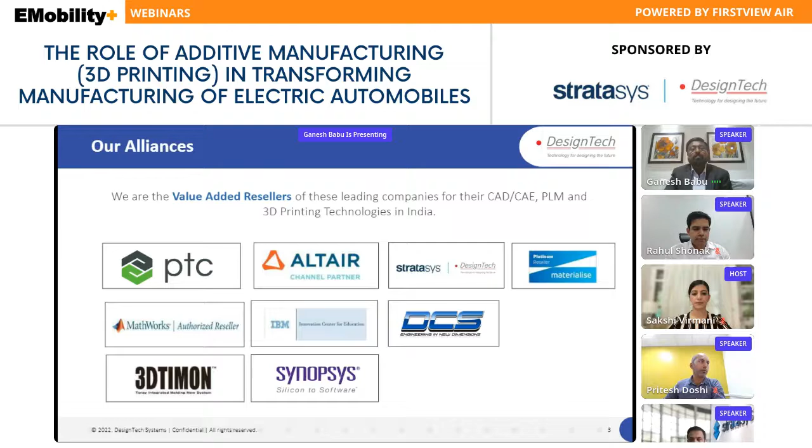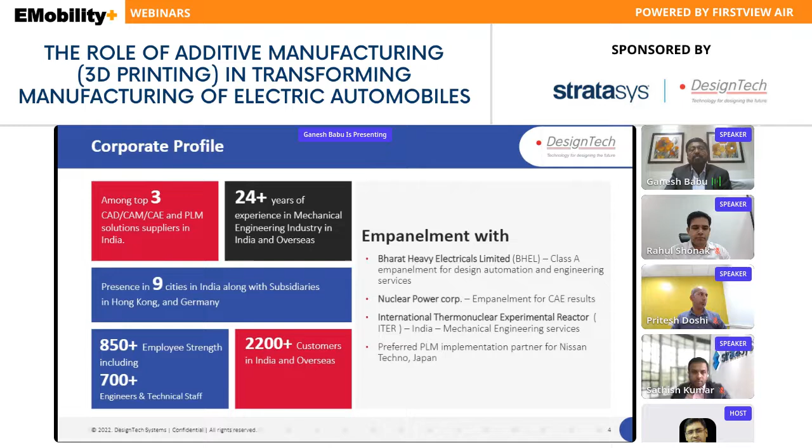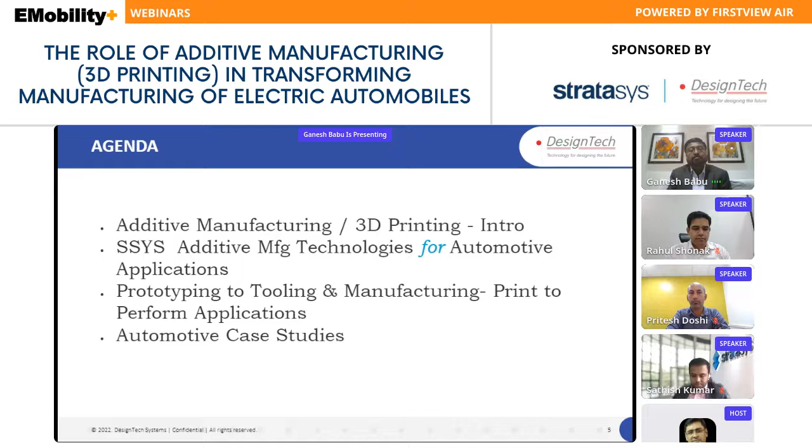Since I have a very short presentation time, I would like to lead on to the agenda today to take you all through additive manufacturing introduction, Stratasys AM technologies for automotive applications exclusively, prototyping to tooling and manufacturing. Primarily, we are going to talk about print to perform applications, automotive case studies, and then we'll get into the panelist discussion.

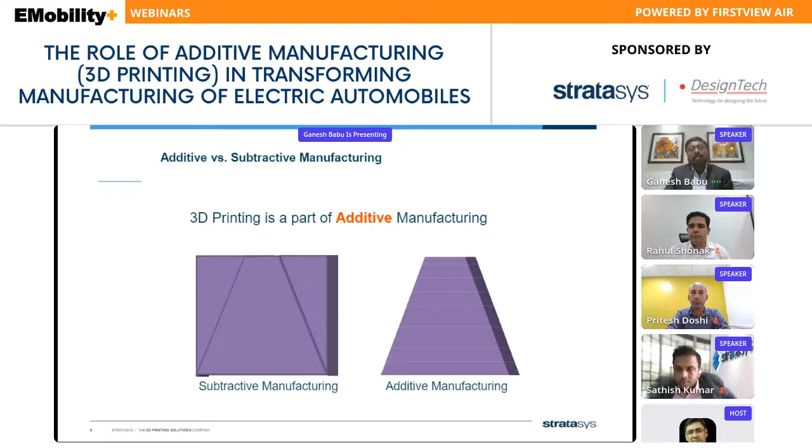Now, additive versus subtractive manufacturing, there shouldn't be any further introduction on additive technologies today. It is very well known that the process of additive manufacturing is opposite to subtractive techniques. All the while, for transportation, we have been using fuel based or gasoline based automotives primarily. But today, the transformation to electric vehicles is catching up for a greener and more viable world to live upon. So, very soon, fuel variants are going to become predominantly extinct.

However, in this onward journey of transformation to electric vehicle mobility, there is not going to be much of a change when it comes to the overall structure of an automotive. But the driving mechanism, the force which drives the mechanism within the automotive, and the components that constitute the electric vehicle are going to be very minimal in terms of manufacturing.

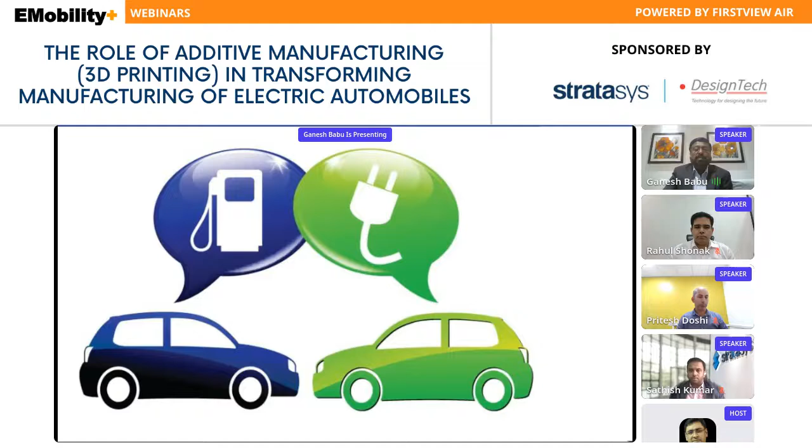While we look at lightweighting as well as creating electric vehicles, the structure and design philosophies of automotive designs are not going to change much, but they're still going to become more and more creative. So today we are going to look at electric vehicles, which predominantly have a powertrain that comprises a battery pack, an electric motor, and transmission for the momentum created in electric automotives.

But for the fuel automotives, an internal combustion mechanism of the engine that burns the fuel to propel and gain momentum for the vehicle is what predominantly separates both of them. Ideally, an electric car is always called a silent machine, thanks to the electric motor which takes care of it. Whereas in a layman's language, a fuel based engine burns fuel to generate energy to propel the vehicle, as simple as that.

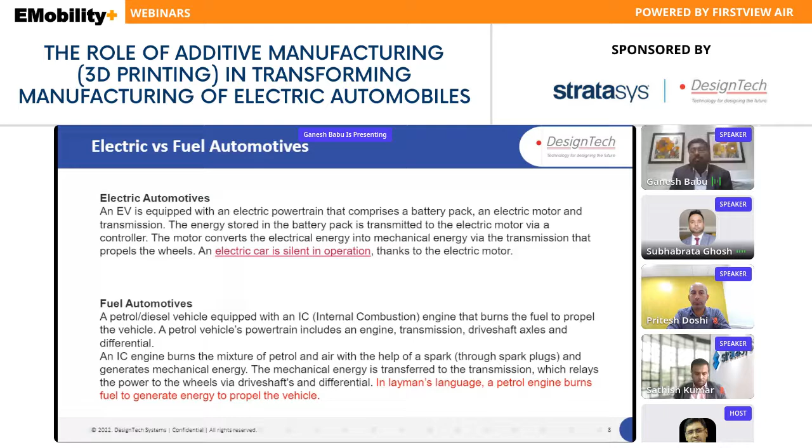So, moving on, while we talk about the key challenges in the automotive vertical, there are increasing regulatory requirements on the existing fuel based variants, tighter fuel economy and emission requirements, and more importantly, with more and more upgrades and newer designs in the fuel variants coming up, the prices are also increasing. And the preference for customization, low volume, and a high level of complexity is taking over the latest designs in the automotive world.

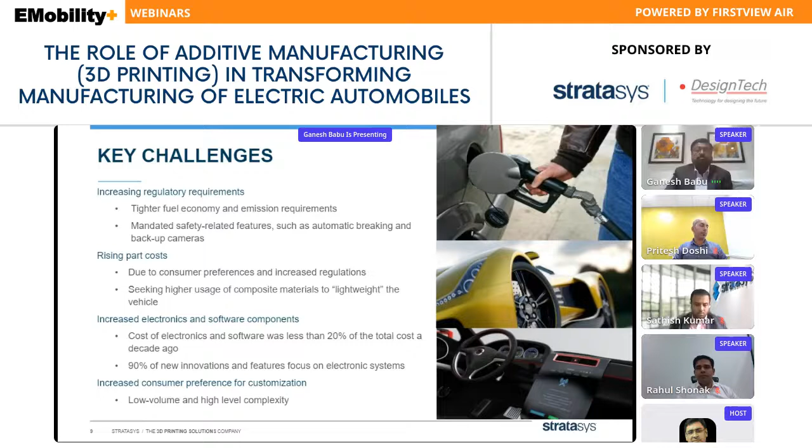But now, while we look at some of the challenges, what is so very interesting about additive manufacturing as a technology for supporting automotive verticals? Well, rapid prototyping, as we all know, from concept to physical realization of parts. Additive manufacturing has been predominantly understood for creating a physical model, called a rapid prototype. However, over the years, the evolution of the technology and primarily Stratasys have been the game changers to revolutionize the way 3D printing has been looked upon.

So now we are going to look at production parts. Production parts that have been rolled out from 3D printers are today assigned to end use automotives that work till the end of life. So there are quite a lot of questions when it comes to production parts. What about the surface qualities? What about the limitations in terms of materials and so on? As I mentioned, Stratasys has been a game changer. We will gather more information in the coming slides on the Stratasys front.

But now, the next segment that I'm focused on is the forming tools. Forming tools have been manufactured through subtractive manufacturing methods that support productionizing of components, with metal predominantly being used. Here we are talking about Stratasys technologies with polymer based tools that give shape to metal. And manufacturing aids are quite a lot. Cost effectively printing without having to compromise or limit the performance of a given tool on the shop floor is something very interesting to take note of.

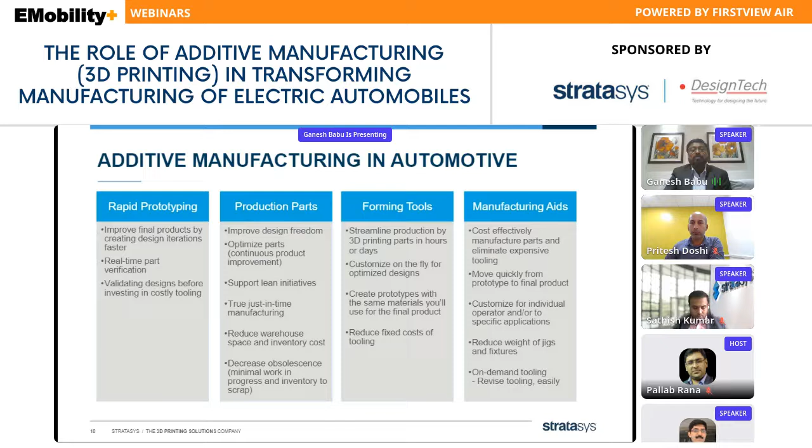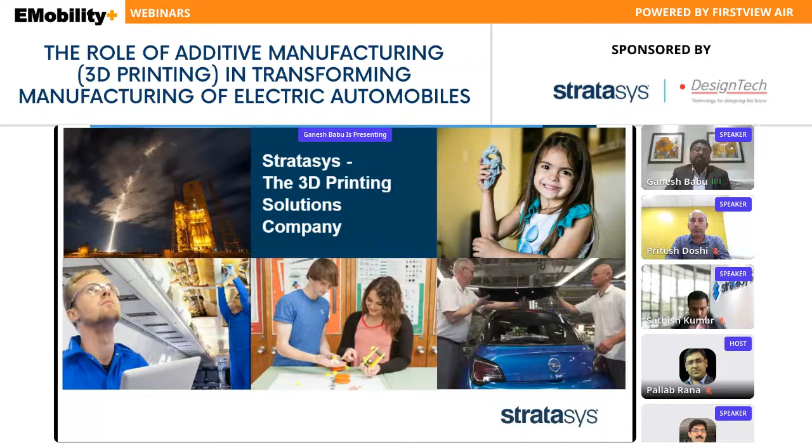Well, with this brief introduction on additive manufacturing for the automotive segment, let's look at Stratasys, the world leaders in additive manufacturing technologies, innovation for the digital factory. Stratasys, the 3D printing solutions company, has touched upon every vertical, whether it is space, with rockets flying with 3D printed hardware, or the medical world, with 3D printed anatomies that mimic what nature has given us very, very closely. It's an exciting world. Apart from aerospace and automotive, the medical segment has been fascinated to work with world leading technologies, untouched by competition, with multi material processing of human anatomies.

For the last 3+ decades, headquartered in Eden Prairie in the US and Rehovot in Israel, there have been multiple granted as well as pending patents for Stratasys. As a publicly traded company on Nasdaq, Stratasys have never shied away from any challenges that come their way. They have been able to add mainstream technologies apart from what they have developed.

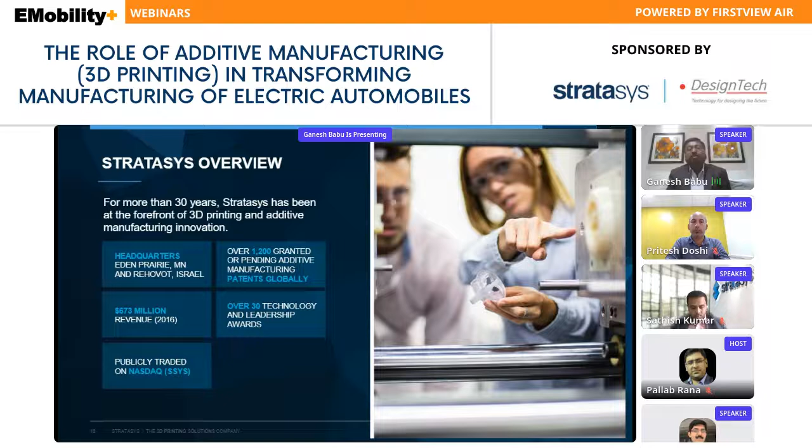But before getting into more on the core strength of Stratasys technologies, let me give you a brief overview of traditional or subtractive manufacturing processes. There are quite a lot of advantages. It's a good fit for high volume productivity, irrespective of the components, whether it is a polymer based or a metal based outcome that you are expecting from a manufactured tool. The subtractive process enables you to process your parts with a wide variety of materials. That's also very interesting to take note of.

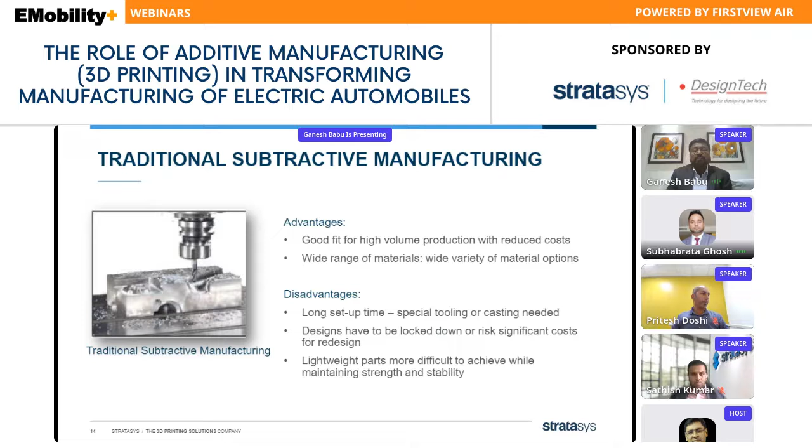Newer materials get developed, they get processed with the subtractive manufactured production tools. But the disadvantages are huge investments, and the time spent in getting the manufactured tools is very long. That's a challenge where additive manufacturing scores, providing a quicker and primarily cost-effective solution. Advantages: you're not going to be limited by any design barriers in manufacturing, because additive as a process gives you unlimited variation of complexity in designs which you could adapt and start printing.

You can integrate your components; we call this part consolidation. You can have a combination of hybrid outcomes with plastics as well as metals integrated in the process of manufacturing. You have a flexible supply chain, which is very important today. No need to have physical tooling or storage spaces that occupy a large factory floor space.

But the disadvantages are limited materials, very limited materials. And that's where the R&D of Stratasys comes into the picture, to integrate and start working on customer-based, end-use, application-based materials that have been rolled out.

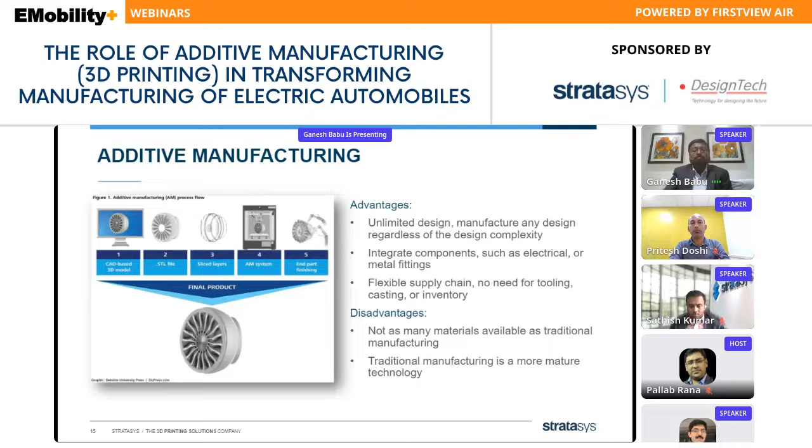Traditionally, we look at manufacturing as a more mature technology. But the various advantages that Stratasys offers today give us design freedom. You can have part consolidation, multifunctional parts, and optimized structures. It could be lattice structures, or design for additive manufacturing, which is a great boon that creates lightweight parts, and more importantly, it ensures that the process of 3D printing is much faster, consuming less material.

What the customers gain by using additive manufacturing has been summarized here. Low volume custom applications can be addressed, and on-demand production can be made fast. For on-demand short-run production, 3D printing today stands up to meet those manufacturing quantities. Part assembly consolidation: here we are talking about limiting the part count, combining multiple parts and consolidating the design, making it more complex, which is a sweet spot for additive manufacturing.

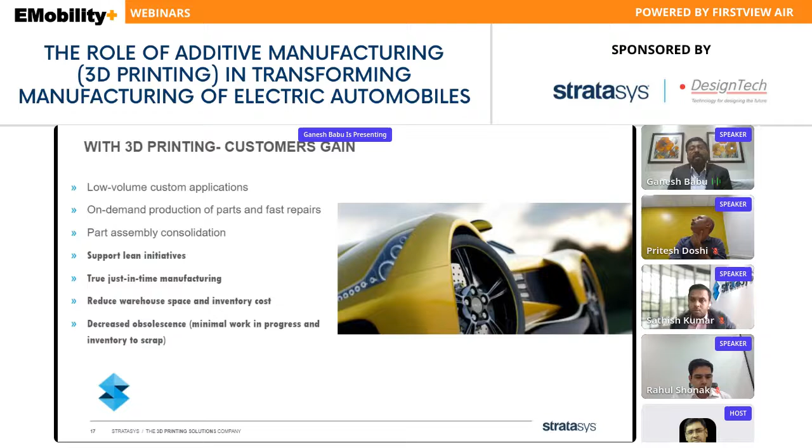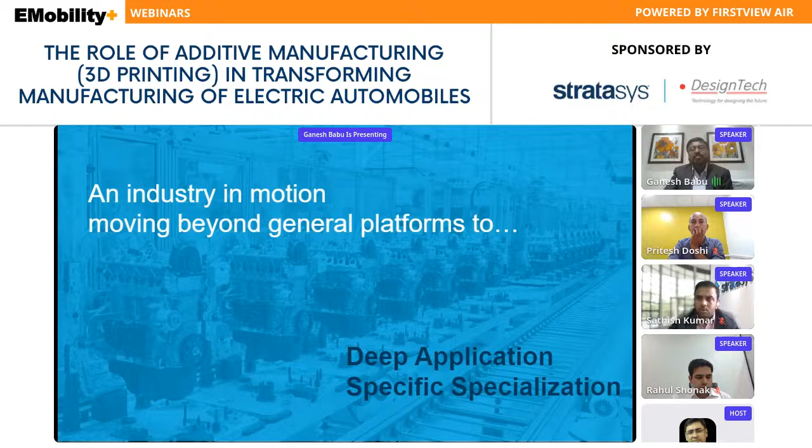And for supporting lean initiatives or true just-in-time manufacturing, additive technologies are the best option today. Here we are looking at Stratasys as an industry in motion, moving beyond general platforms and focusing more on deep applications. What are these specialty applications, and what are the technologies that Stratasys supports today?

Today we are looking at five different best-in-class, world-renowned technologies supported by Stratasys. All along, industrial FDM and PolyJet technologies were ruling the Stratasys product lines. But with the introduction of additional technologies, from companies acquired by Stratasys, they have reinvented the wheel of manufacturing. Today we are looking at manufacturing tools and production parts from these technologies. We will look very briefly at all five and where they lead the automotive world in acquiring best-in-class parts for manufacturing.

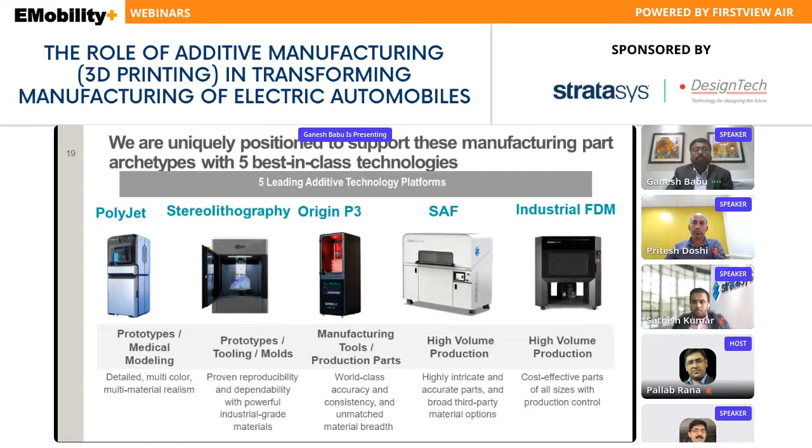Moving on very quickly, here we have a brief on the SAF technology. We call it selective absorption fusion, wherein, while supporting the green revolution for automobile manufacturing, here is a technology with a 100% bio-based, sustainable castor oil-based raw material, polyamide PA11. And there are various value adds working with this material and the technology.

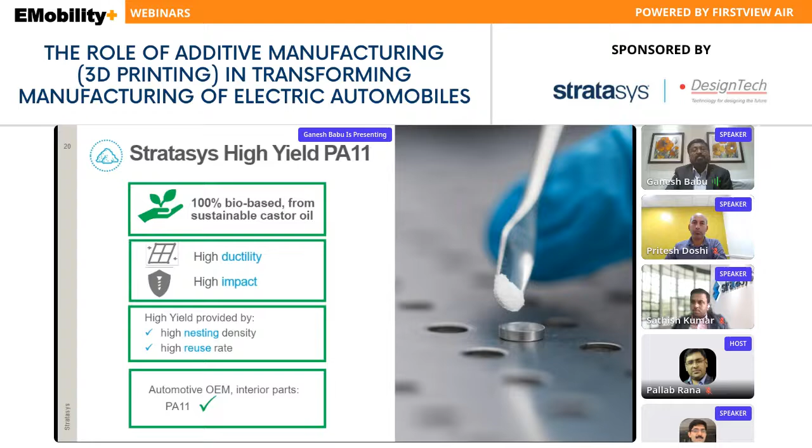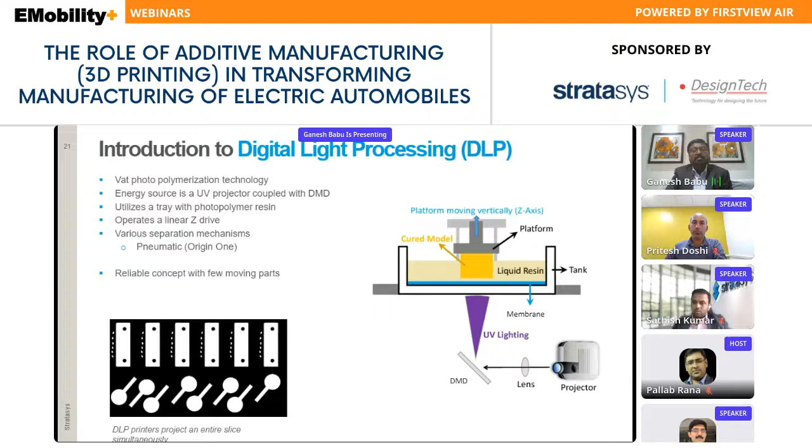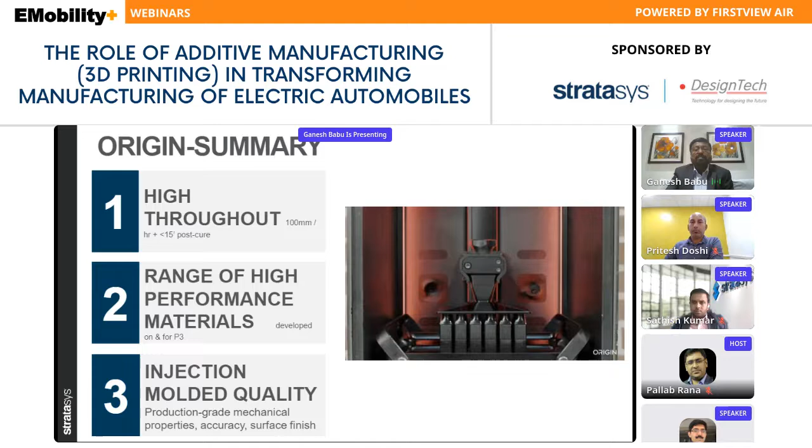And the DLP process of the Origin One, it's a VAT-based system, ideally best fit when it comes to realizing end production parts. I'll take you through a few other throughputs, but the summarization on the DLP stands for high throughput, range of high performance materials, injection molded quality. And here we are looking at PolyJet.

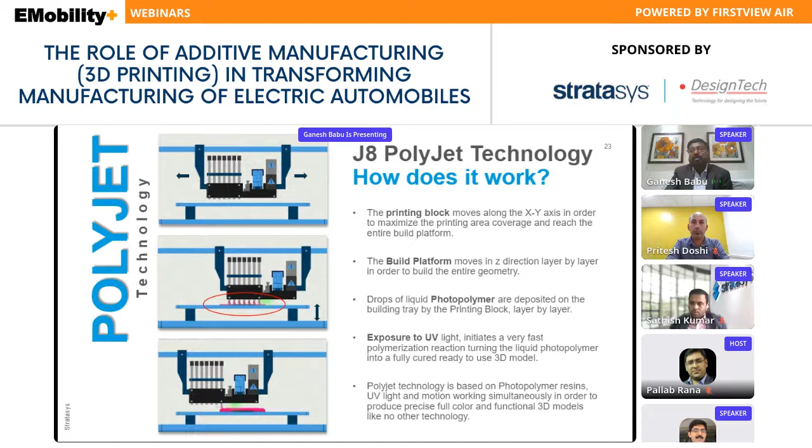As I mentioned, here's a platform that could allow you to mix and match seven different materials on the go. The eighth material can be the support material, soluble in nature, as well as a washable material. Highly front ending to support design realism for high fidelity modeling. CMF outputs, color, material, finish, are today never left behind. In a single shot printing, you'll be able to achieve that.

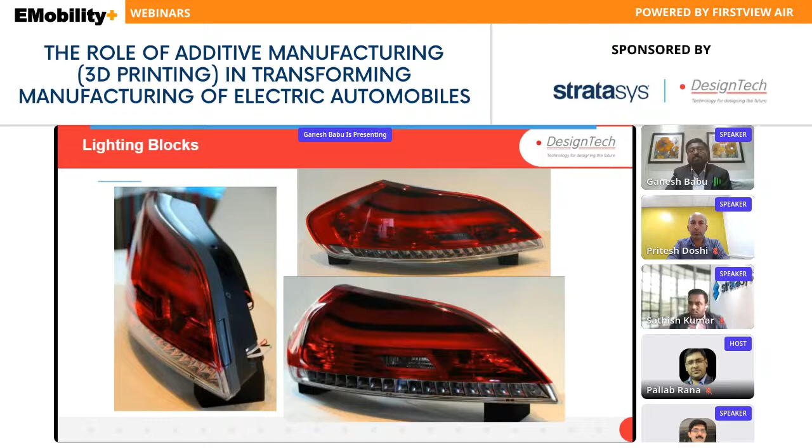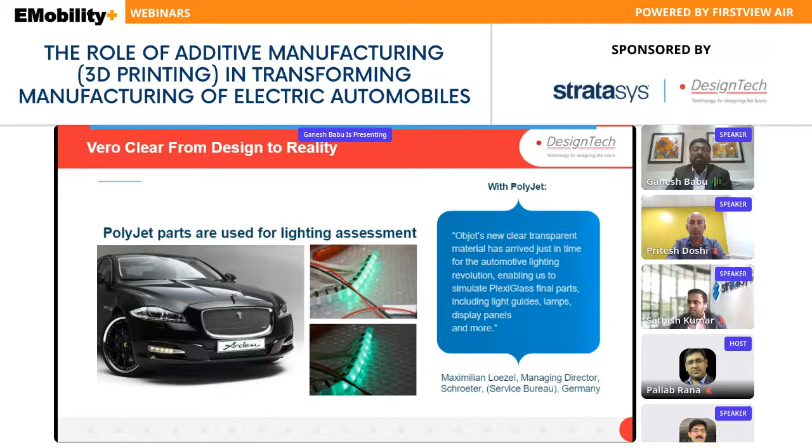And with PolyJet, the realization of lighting blocks gets closer to injection molded quality in your product development. If you're going to look at making these clear light blocks, truly the best in class the world could see is the PolyJet technology from Stratasys. So PolyJet parts are used for lighting assessments because of the transparency and the ability to reach the colors of the production parts.

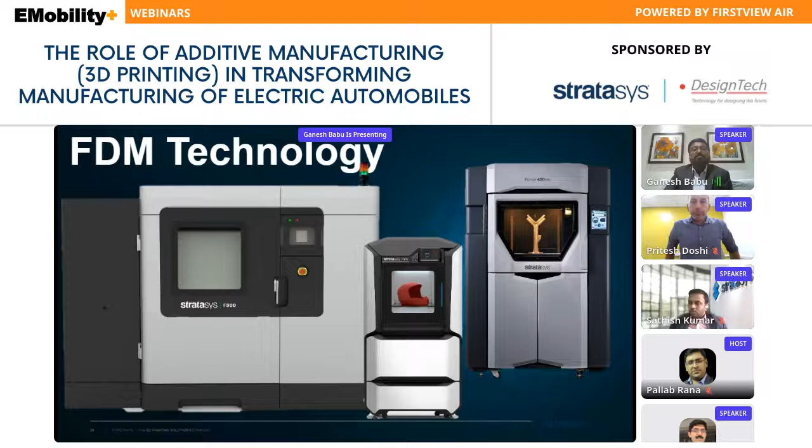Now looking at the FDM technology, these are workhorses. Never looking back. You could customize your prints, solid to various levels of customized throughputs that could be realized with the technology. The applications vary from prototyping to tooling and end use parts with the Stratasys product line.

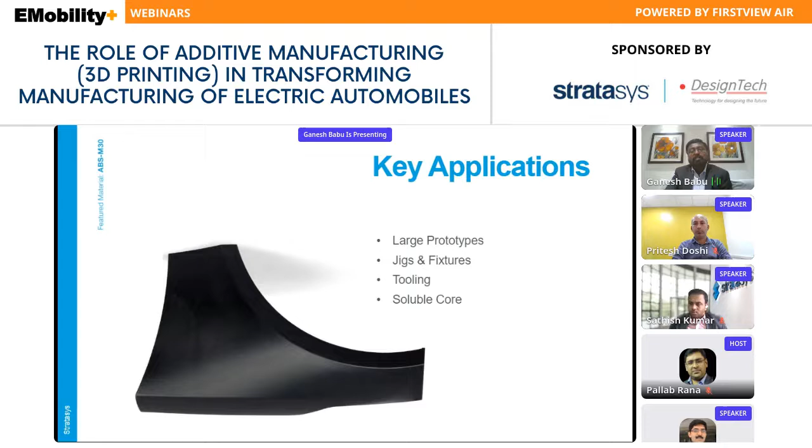But the key applications that we look at using all these technologies are large prototyping, jigs and fixtures that could support the manufacturing lines on the shop floor, tooling applications, soluble cores, wherein without any split for non-linear features, you will have the soluble cores that could support you to realize your parts in quick turnaround time without any tooling.

But when it comes to end use applications, here we have for automotive exclusively a UV stable material called ASA that you can print, and you could have your class of designs that you can print and mount on these bumpers, which are called end use car panel applications that are well supported.

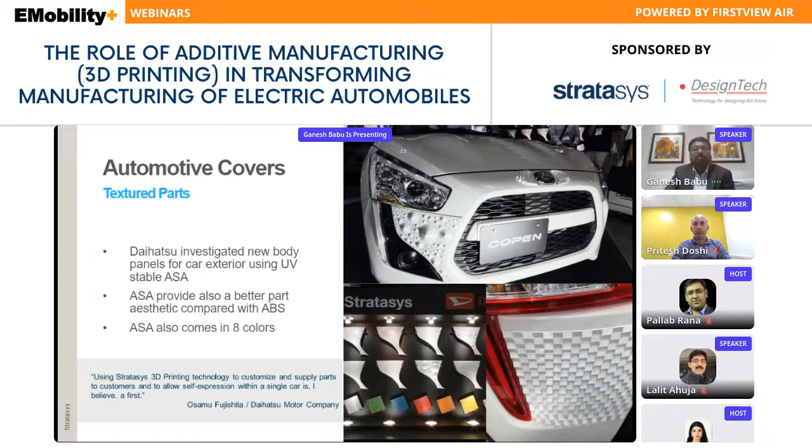While we are talking about electric mobility, irrespective of any given variant for the automotive sector, what is very interesting is how quickly you can have high strength, highly durable outputs. Not only automotives, I have been associated with various aerospace majors to create fuselages, wherein whether it's a helicopter model or an aerospace design, the FDM technology, the F900, stands by to print large segmented parts that can be mounted together post printing.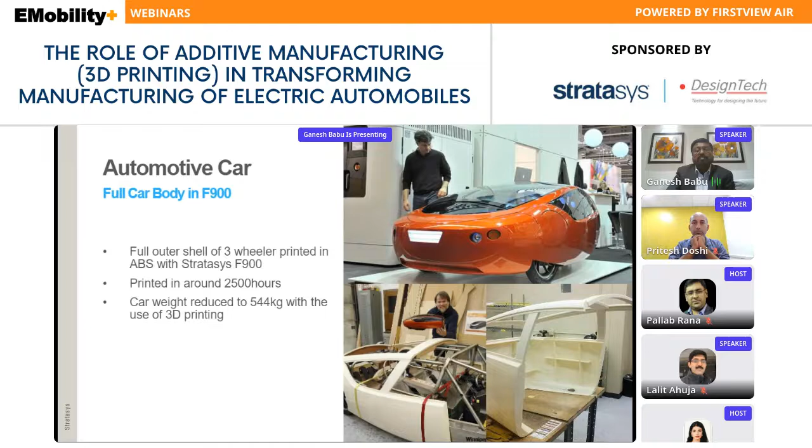And now comes the interesting aspect of applications. Every given product line has something or the other to talk about in terms of sheet metal components. Now, while we look at giving shape to sheet metal parts without progressive tooling, we have to look into form tools, stage-wise forming tools.

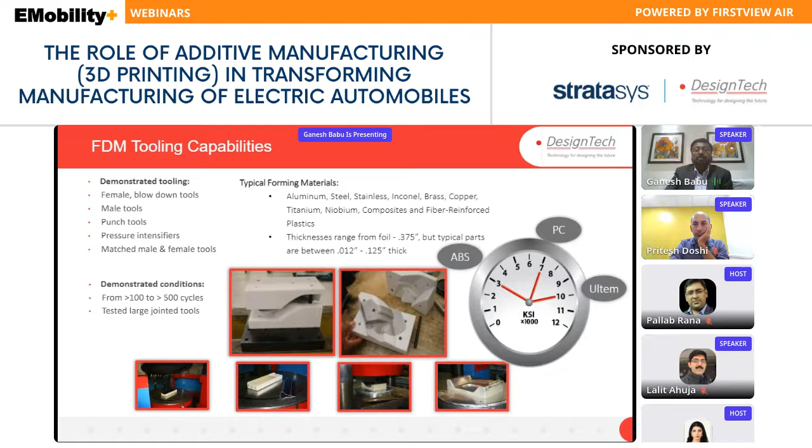Typically, you are not limited to only soft metal. Yes, you can work with titanium, you can work with stainless steel, but the quantities can get narrowed down well before your production tooling can come into the picture. These could give you batch quantity manufacturing that could happen on the fly. Overnight printing of tools, you have your blanks ready, put them on these polymer tools and get to realize those quick numbers in a very short period of time.

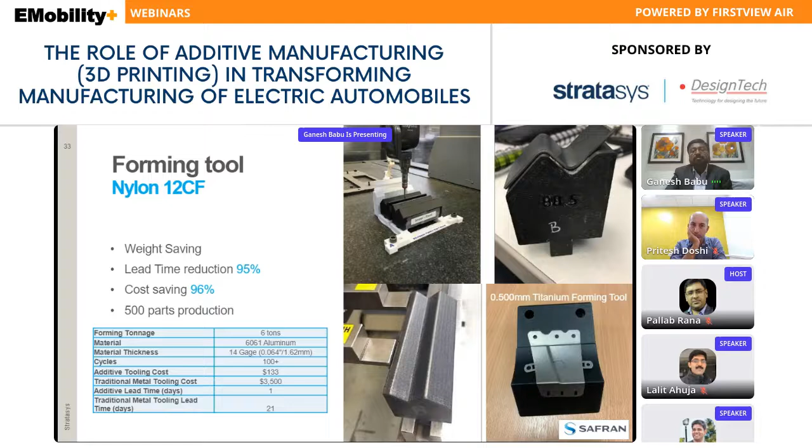Today, there are materials such as carbon fiber filled nylon that could be used for more durable printing. Here, even if it is not 95% on the lead time savings or on the cost savings, there could be savings in excess of 60% and above in terms of both cost as well as time by using the polymer based FDM technology in printing form tools for sheet metal forming applications.

The variety of materials, the high performance range of materials that the FDM technology offers today can give you materials such as the FDM Nylon 12 CF. These are chopped carbon fibers wherein these materials withstand high fatigue, with high strength and stiffness to weight ratio, an excellent material for lightweighting tooling, functional prototyping, production parts, end use parts, and more.

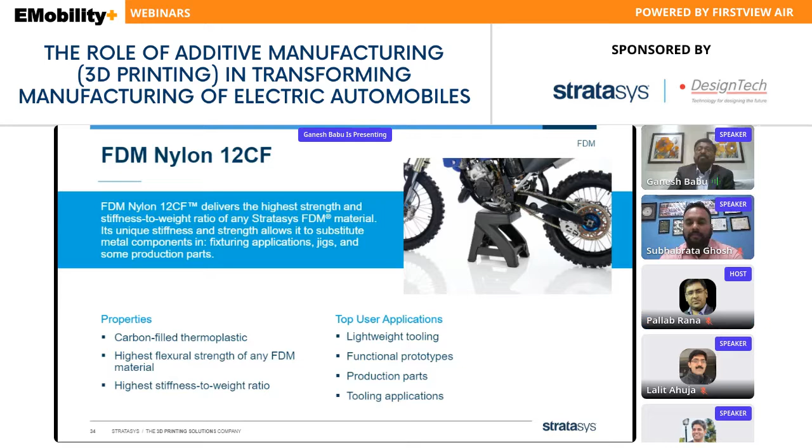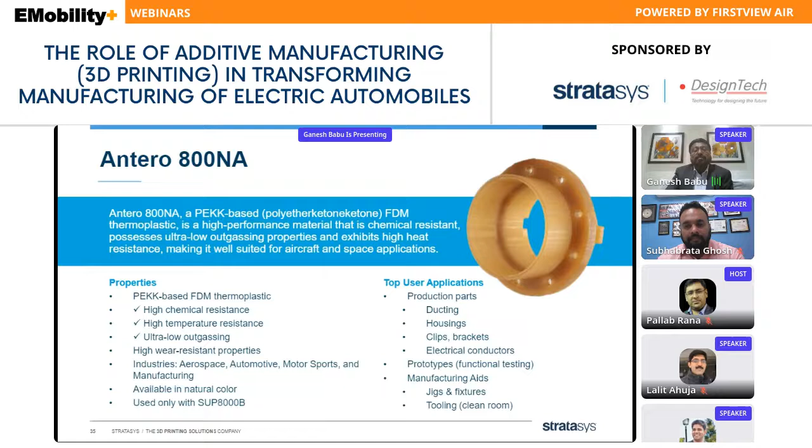Very similarly, we have the Antero 800NA. Antero is a grade equating to the PEKK material. We call them polyether ketone ketone based material. It is a high chemical resistance and high temperature resistant material with ultra low outgassing and high wear resistant properties, wherein they can withstand more and more manufacturing rigors on the shop floor to support shop floor manufacturing.

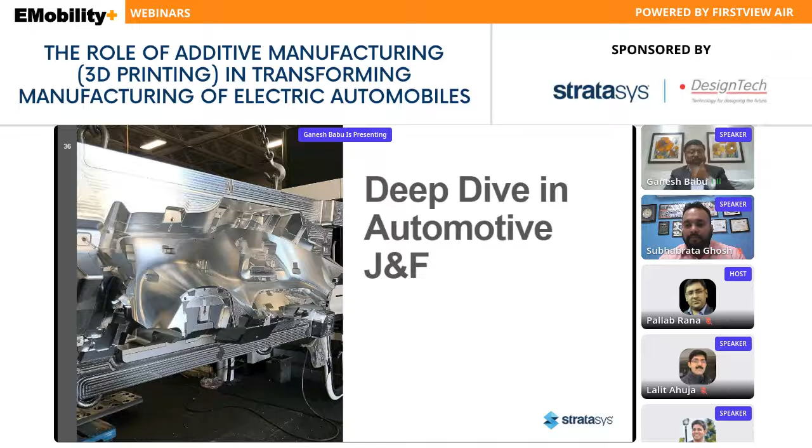While we deep dive into automotive jigs and fixtures, the complexities of a given part that get machined, whichever sector of manufacturing it is. Here are some of the automotive gauges that have been printed. All the while it has been metal. You need to suspend those metal gauges for edge checking through cranes, etc. Today you have the flexibility to design for additive manufacturing, lightweighting, and more importantly, a single operator can use a 3D printed ABS output for edge checking gauges.

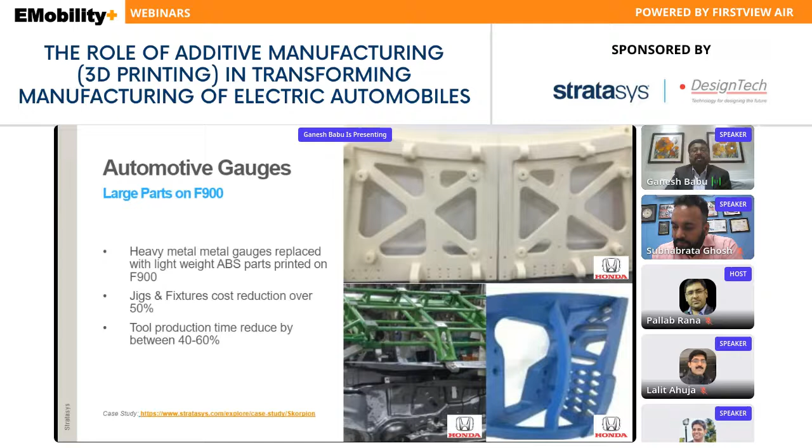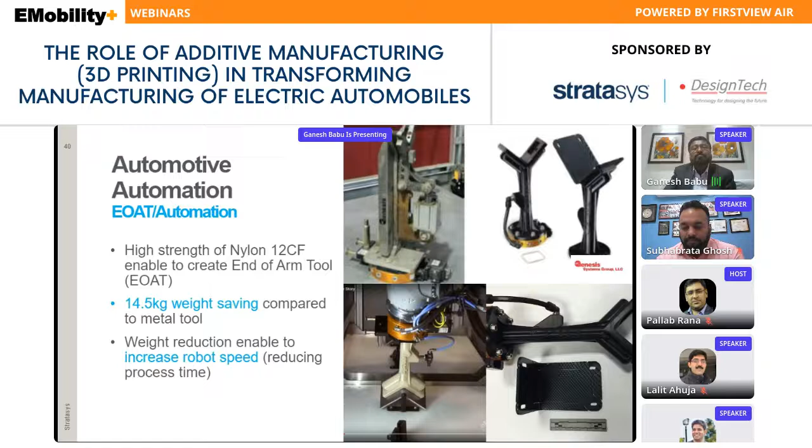On the same lines, various automotive majors are using it for end use applications and end of arm applications such as Nylon 12 CF tooling, wherein it is a single part with part consolidation. With traditional methods, as you see, the metal blocks are huge and heavy, and multiple settings are called for in manufacturing these complex tools. But today with 3D printing as a single step solution, you're able to realize end use parts that could go on automotives.

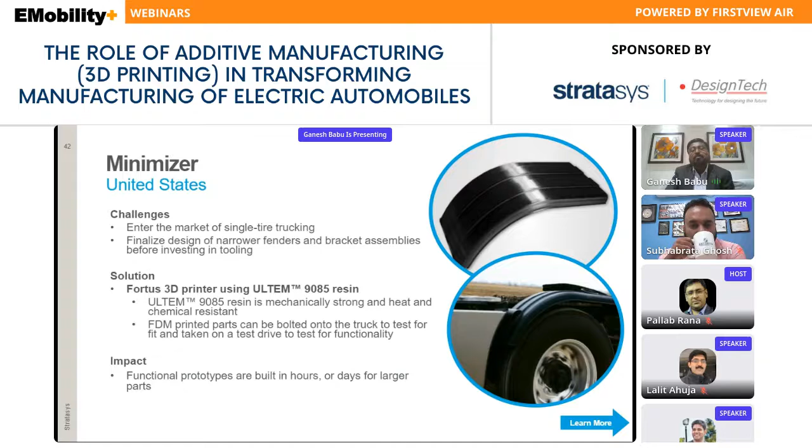Some of the case studies, very quickly, I'll rush them through. Minimizer uses these fenders. These are fenders on the truck, printed with black Ultem material, directly mounted onto the truck and field tested for the design and part strength before stepping into production. For low quantity manufacturing, it's an ideal fit. And on transmission gears, Premium Transmission in India uses ABS based outputs for complex transmission parts.

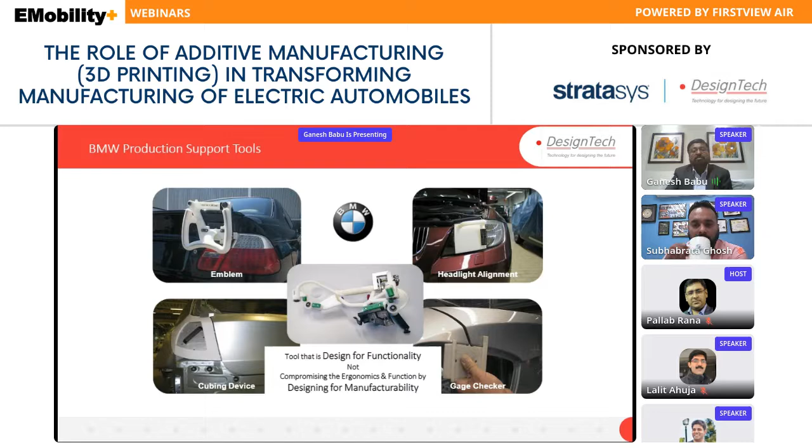And when we are looking at tools for automotive product lines, here we have BMW using Stratasys FDM technology for every vehicle variant. More than 400 jigs and fixtures have been rolled out, under the hood, as well as for headlight alignment, emblem placement fixtures, cubing devices, and so on. All these are quickly manufactured.

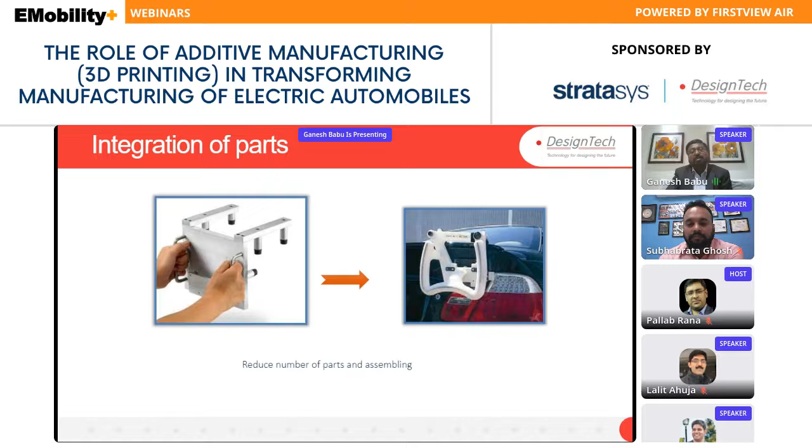There you see on the left the handles, heavy metal fixtures being replaced with lightweight internal sparse mode printing, giving more comfort and addressing worker fatigue in the automotive sector. Automotives have started using them on the shop floor. Multiple sets of these printed parts are used on the shop floor today. There you see the various designs wherein additive has taken over and supported the manufacturing lines in a very big way.

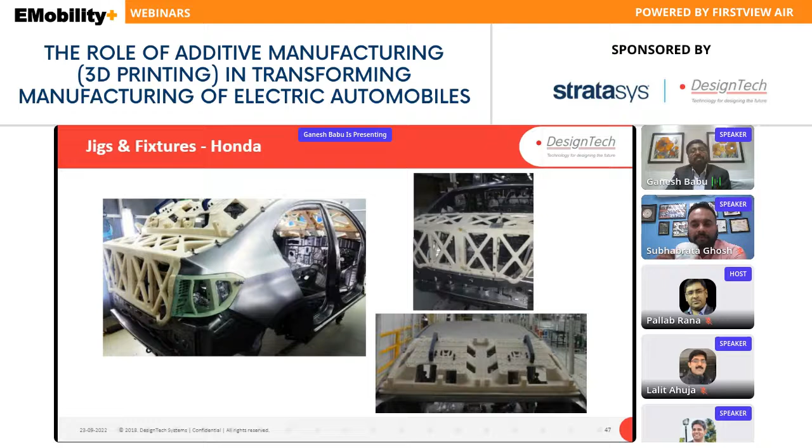Honda has used this instrument panel. What is interesting about the instrument panel as a prototype part is that it is printed in multiple segments and then bonded together. The creative edge here for the designer is not just catching flaws in the design, but beyond that, when production has to start, what we call concurrent engineering, to develop fixtures. All those seven small blue stubs with the complex profiles captured from the part are printed with FDM ABS blue material, and they are a one-time setup on the CNC platform.

I would rather take a printed part, locate it, and start checking for work holding as well as for CMM inspection. And this is the creative edge. Looking at small little stubs taking the entire instrument panel load gives a creative thought, and that has led to various new and more interesting shop floor application fixtures.

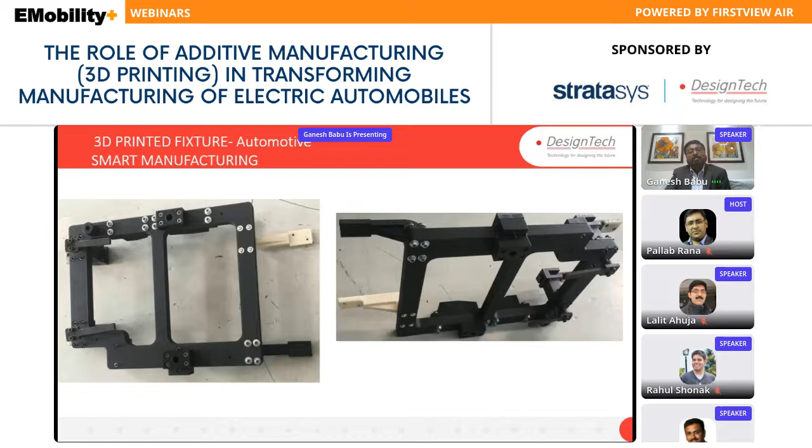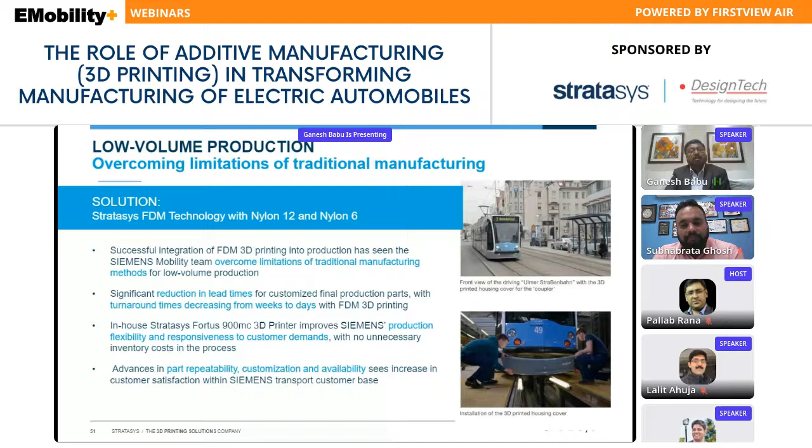Here are the smart manufactured fixtures which I have been associated with for an XUV500. This takes a load of close to 280 kgs for setting the carriage and the engine to be put up for assembly. And ideally, when it comes to low volume production, here we are looking at a technology that could support nylon 12, nylon 6, nylon 12 CF, and so on. So FDM is for high strength durability that supports all automotive manufacturing as well as manufacturing tools.

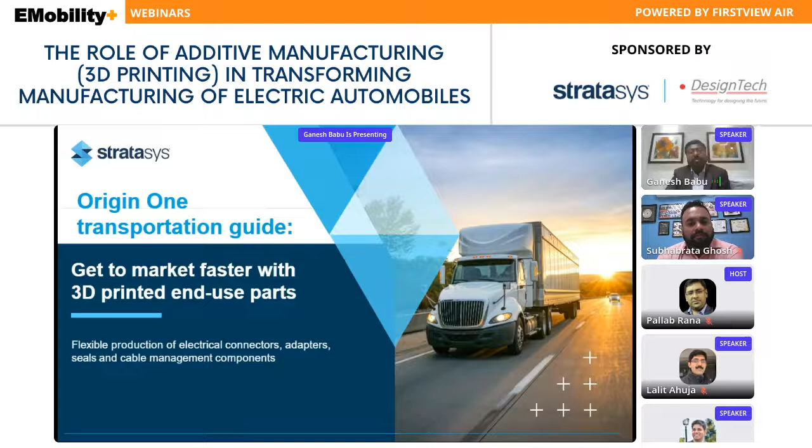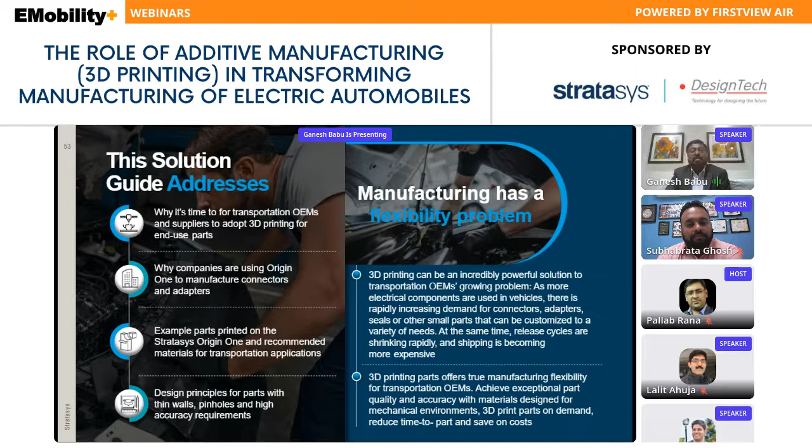Now, Origin One, the P3 technology: when we are getting to market as fast as possible with 3D printed end use parts, here we are finally realizing flexibility. While we are talking about moving on to EV manufacturing, what is interesting is, are we prepared to have quicker solutions to support the cost of newer development in the design and the manufacturing process? Yes, here it is time for end use part manufacturing.

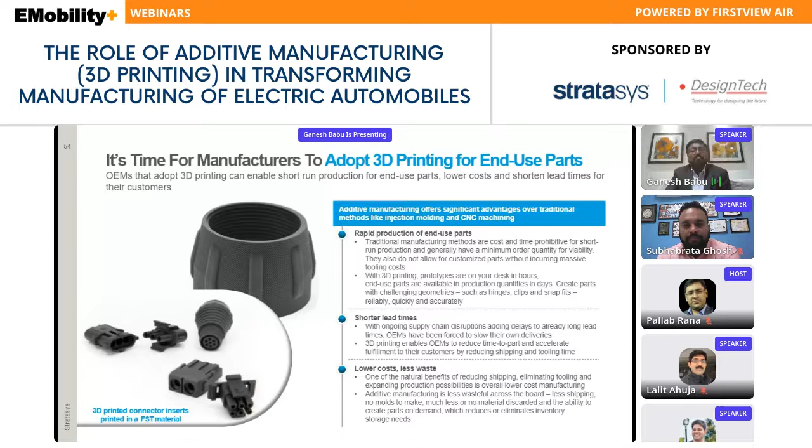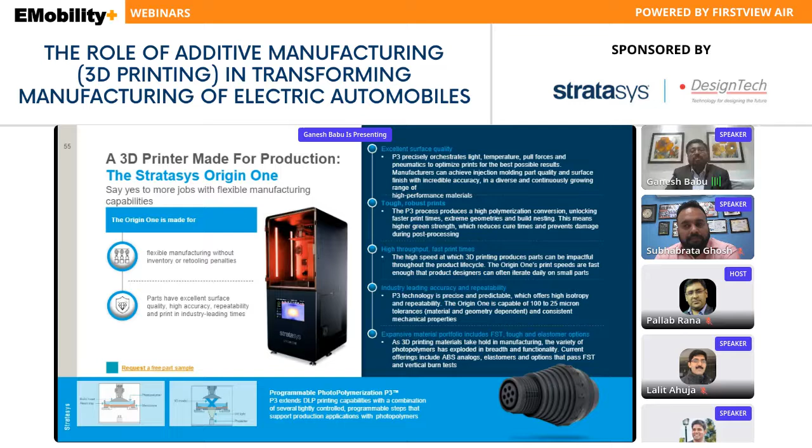Ideally, the best fit here is for all small components, whether it is the connectors, all of them with very minimal time consumed, with high precision and injection molded quality surface finish. As an open source platform, it can also let you achieve very fine accuracies, with tough and robust materials available. And when the surface quality is of injection molded grade, there are unlimited possibilities to adapt to newer modes of automotive manufacturing of end use parts.

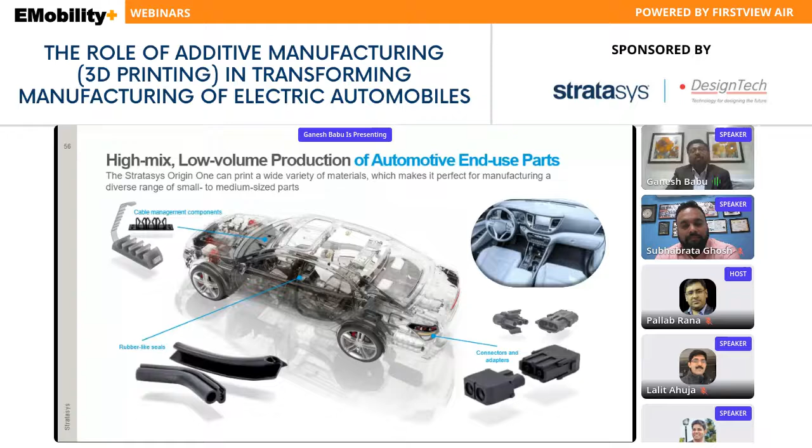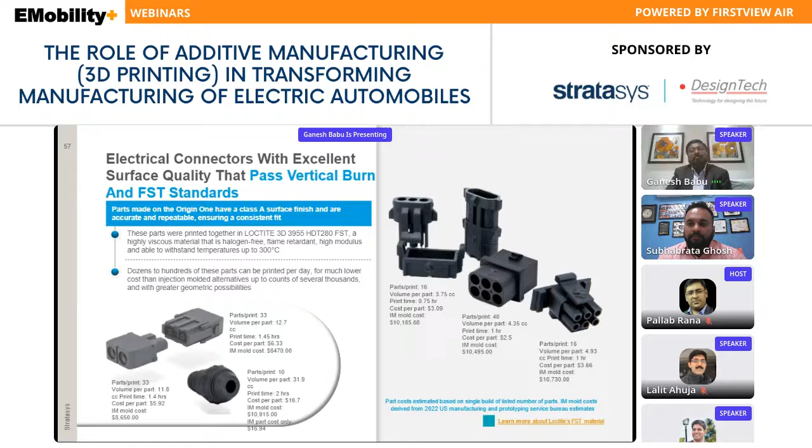Ideally, the best fit here is a single system that can give you high strength materials and flexible materials, all on a single platform. And more importantly, with very quick and easy change of materials from one material to the other, even for the more complex parts, soft tool manufacturing is eliminated. And we have FST grade materials that support stringent manufacturing requirements, and flexible rubber seals for automotive. All this could be manufactured with the Origin P3 technology.

Moving on with additive manufacturing produced tools, here is more of a hybrid case, where a complex 5-axis surface needs a fixture for drilling with a certain pitch, distance and accuracy. You have fixtures generated with 3D printing using FDM technology. So tooling with more complexity is well addressed, with improved ergonomics, lightweighting, weight reduction, easy customization, and today these are cost effective for low quantities and a best fit to begin with.

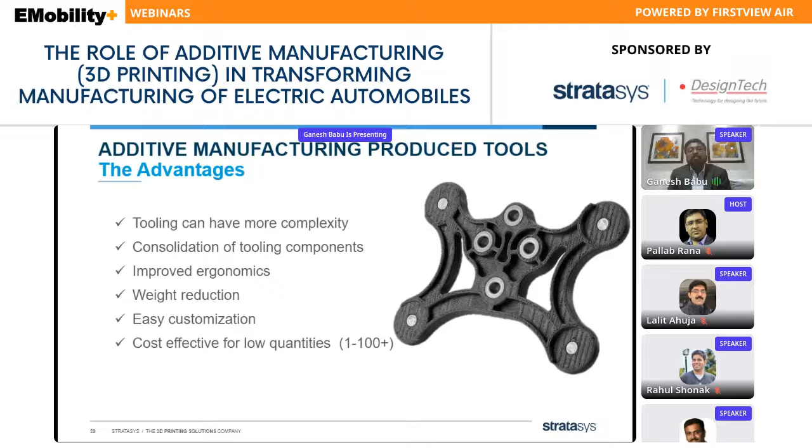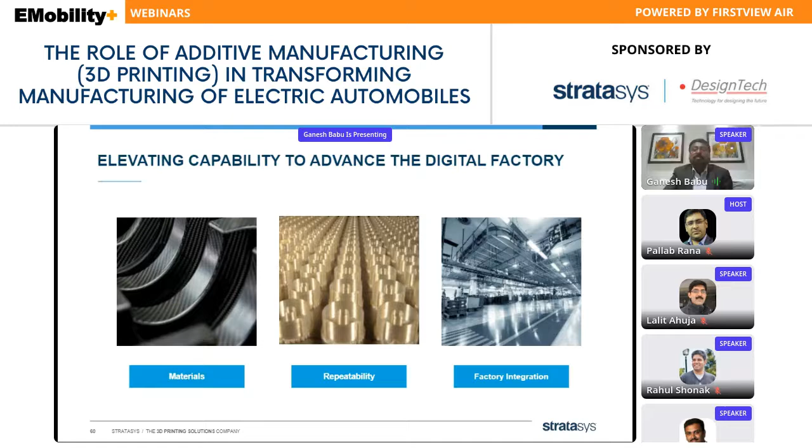So elevating capability to advance a digital factory has always been the mantra for Stratasys. Stratasys has the right choice of materials with repeatable quality, and more importantly, without thinking that without working along with subtractive techniques, additive can never support production. Hence it is known as a factory integrated technology which can be used on the shop floor along with traditional and subtractive techniques.

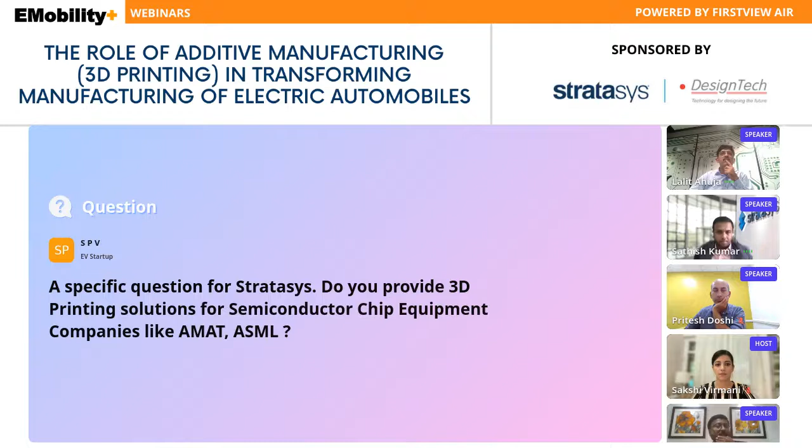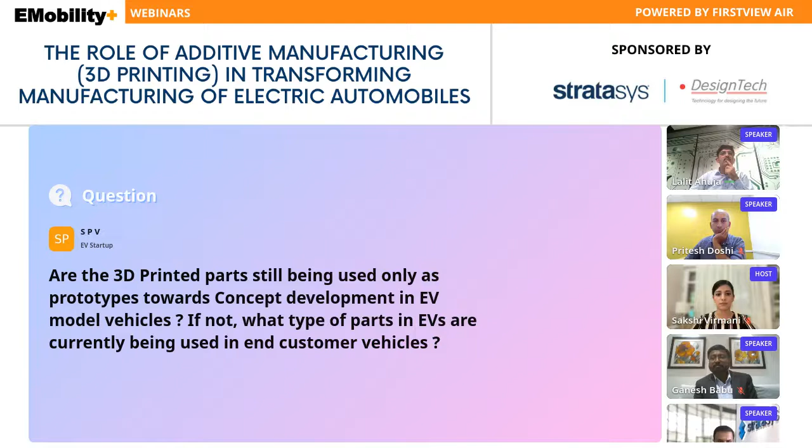The second question: are the 3D printed parts still being used only as prototypes towards concept development in EV model vehicles? If not, what types of parts in EVs are currently being used in end customer vehicles? Already we have discussed this point. I'll go to the next question, by Mr. Anil Kulkarni.

Accuracy is one of the issues. We observe that spline accuracy and internal threads are not achieved with AM. Is there any solution for it? Maybe I can answer that one. Primarily, in plastic parts in 3D printing, directly printing threads is not recommended, first of all. There are some DfAM principles, and we also have some application guides on our Stratasys page. You can refer to that on how to achieve the best results.

My doubt was, is there any accuracy difference between 3D printed parts and real parts? How much is the difference? Satish, if you can answer. Okay. This is very generic, but accuracy depends on many parameters, like how you orient the part, what considerations you take for the materials, everything.

But if I consider our P3 technology, which we primarily focus on production, the accuracy is very good. Some of them even come close to the 50 micron range. So it all depends on materials and orientation, and you should also understand the part requirement. Everything plays a role in getting that accuracy. Even material selection in additive is one of the major criteria to get that. That is a very important criterion.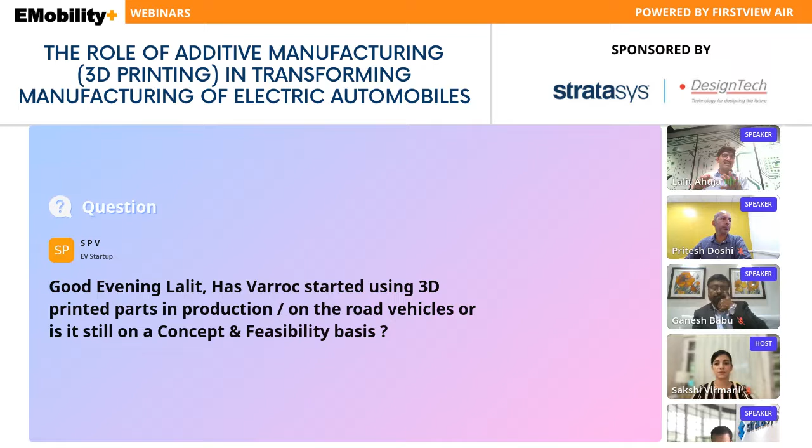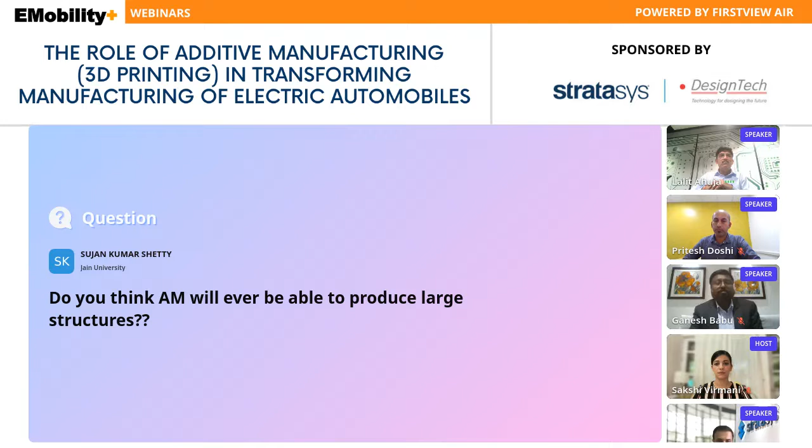Next question is, do you think AM will ever be able to produce large structures? I think we have already discussed it. Okay, the next question: as this is a layer by layer process and may not sustain torque and heavy load applications, is there any solution to overcome it? I believe Ganesh is the right person. It's not an issue because the material can take such a high load. We even tried vibration testing for this fixture.

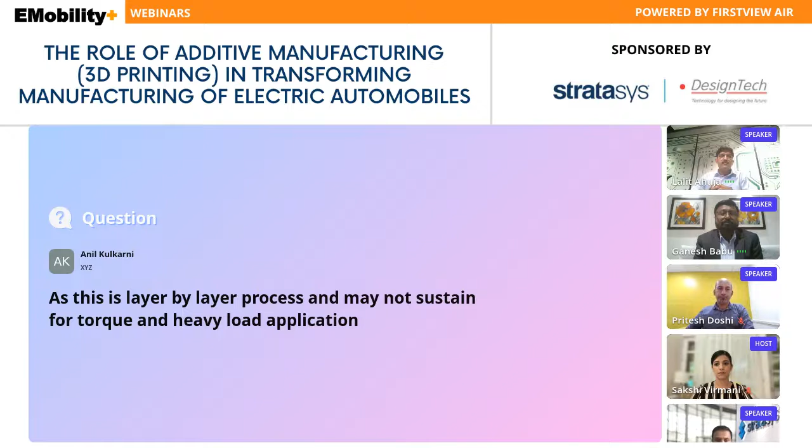Yeah, I think we had a lot of discussion on this. I think Mr. Ganesh Babu will agree that additive manufacturing 3D printing has an upper hand over other processes on this strength point. I'll go to the next point. We are talking about serial production. How can we overcome strength issues? Already we have discussed this.

Okay, I can answer this one for serial production. We recently published many case studies on our website, very focused on this, because right now everybody is looking at how to make parts in quantities of 500, less than 2,000, 5,000. This is the reason we introduced our SAF and P3 technology specifically for that, where you will get very high impact load also. We are also coming up with a completely open material license, so you can identify your own material and fine tune it with our printer. This is a completely game changing innovation in that segment.

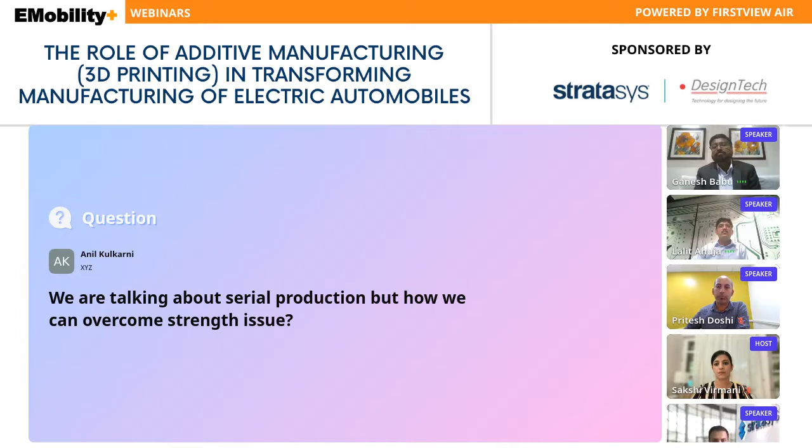I don't know whether it is a statement or a question. Good structure for heat transfer application. Good material to absorb heat in 3D printing. How much thickness, volume to cool object. Best software to design. I think point number four is best software to design.

Anything need to add, Mr. Ganesh? You need to add anything? Yes, I would like to take this question.

First of all, while we talk about good heat transfer, it very best applies to the customized processing in additive manufacturing. Today, while we talk about good material to absorb heat in 3D printing, while talking about polymers, there is no polymer that could absorb heat. But how could you transfer heat from a given print surface all the way down to the build platform is in question.

So ideally, while we talk about using high performance grades of material, we have the various grades of Ultems and high performance materials in the FDM technology from Stratasys. Ideally, the best fit is to have an internal selective sparse structure by which, if the geometry calls for a too solid structure to be printed, during processing you have selective selection of applying a sparse mode or a customized internal fill, which ideally takes care in the polymer printing process that you'll have quality outputs without warpage during printing.

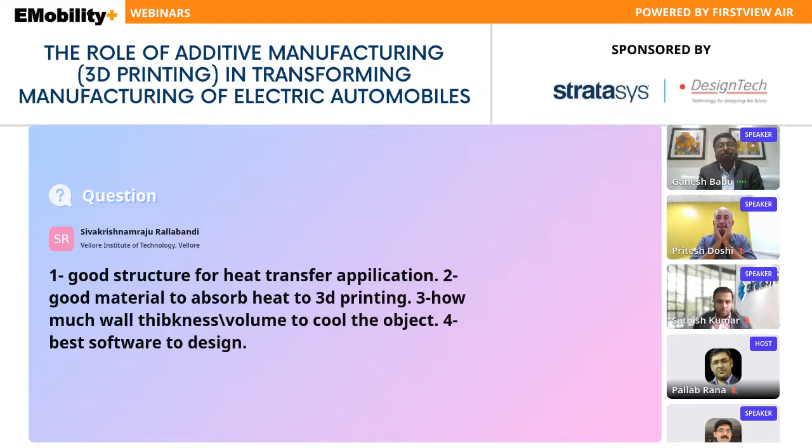I'll go to the next question. Is any topology optimization needed before printing? Well, topology optimization is something that is generally applied to lightweighting of your parts, and more importantly, based upon your analysis from the geometry. Ideally, it's the best fit if you can optimize your structures without compromising the performance of a given geometry. It is ideal to optimize and start printing and check the various parameters of load bearing and performance of a given geometry.

But predominantly, it is the material selection, and FDM, the production series technology today allows you to work with 16 different materials. So there are a wide variety of materials that could be selectively chosen, and with the topology optimized structures that could be printed, tried, and tested.

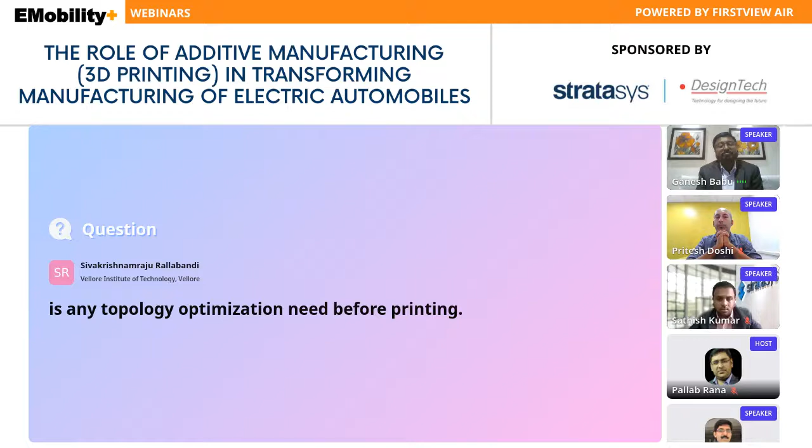Now I'll go to the first question. On an average, what percent of production cycle time can be saved while making an EV two-wheeler by adopting additive manufacturing to the highest extent possible? Well, it is a gross question in terms of what could be the production cycle time savings for making a complete EV two-wheeler. So there are platforms that could print parts of nearly 1000 millimeters with the Stratasys FDM technology, and coupling it with the Origin P3 for more performance based, smaller outputs, higher throughputs, as well as good surface finish, tighter tolerances. It's a mix and match.

What could be an ideal technology that you're choosing? Are you looking at the exterior of an automotive completely printable with FDM? It's a great choice. But when it comes to the internal components, there the selection with Origin or the PolyJet technology also plays a role. So all summing up together with multiple technologies from Stratasys, if you're looking at printing a two-wheeler, a week's time should be comparable time in order to realize the complete hardware part of printing with multiple technologies from Stratasys to support, and that could be a possibility.

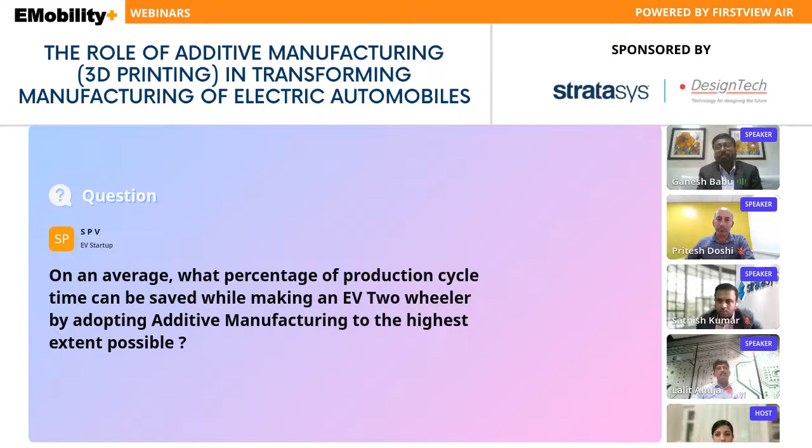Two more questions added in the meantime. What is the scope of metallic 3D printing? Anybody want to answer on this? Whether it is metal 3D printing or metallic 3D printing, okay, let me take it as a metal 3D printing process. Today, while we talk about metal 3D printing, the EV vehicle in general has minimized structures, minimized components. While we talk about an EV automotive, ideally we are looking at minimizing the total component or the bill of material on the component list for an automotive.

So metals are very, very nominal because you don't have a combustion engine which calls for a metal part to be printed. However, wherever there is a necessity to print, ideally, today look upon Stratasys FDM as a technology. We have materials such as PEKK, Antero, or Ultem based materials. These are all game changers. Today, aerospace and automotive industries have replaced metal parts with 3D printed plastics using the Stratasys FDM technology.

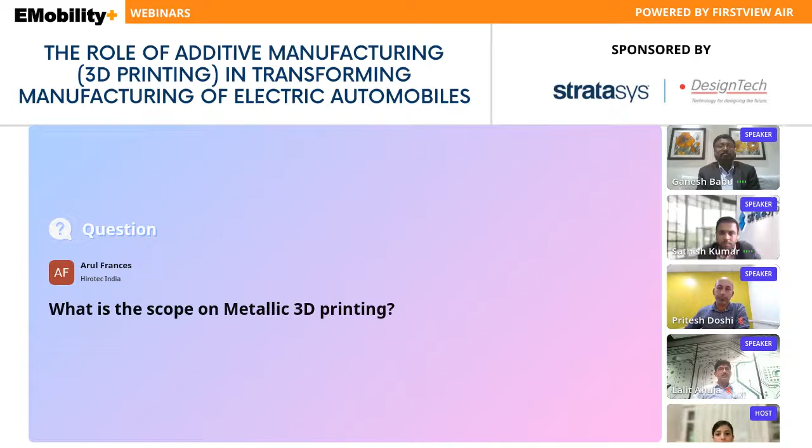Another question, I'm just adding. I'll just add to that previous question. So in the part of metallic 3D printing, you can still use the regular FDM technology. You can also go for investment casting and sand casting, and many other processes you can achieve with that one. So that is how you can make it very cost effective, because it's not only producing the part; how cost effectively you are producing also matters. So you can make it in such a way that your production is also cost effective.

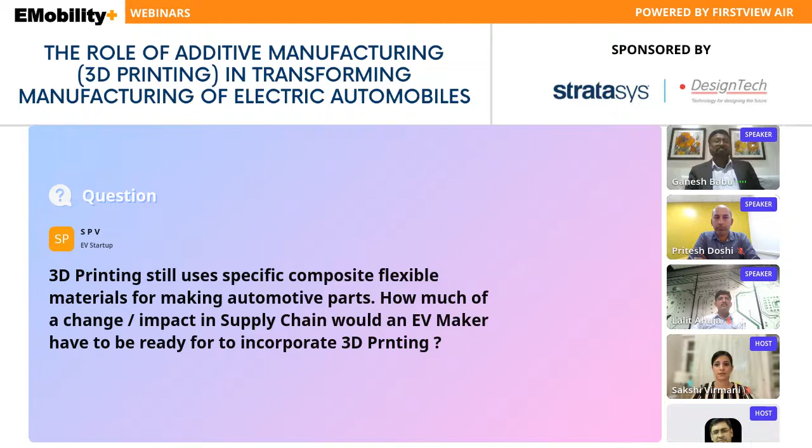This is the second time Mr. Sujan has asked this question. I'll ask the last question. Mr. Sujan Kumar Shetty, Jain University: With additive manufacturing, the cost of entry is still prohibitive to many organizations. How can it be overcome?

I will answer this one. See, there are varieties of material available. So, what is your selection of material? You need to select from the material aspect, because material is what determines your application and also your cost factor. So that is where you need to start.

And right now, we have wide ranges of materials available. We have standard, engineering, and high performance. It is not always your requirement to go for high performance. You can also start most applications with engineering and standard material. And like I mentioned, right now we are also coming with a completely open source material ecosystem. So if you find your material is much more cost effective and it can work for your requirements, you can still make it a very cost effective approach that way.

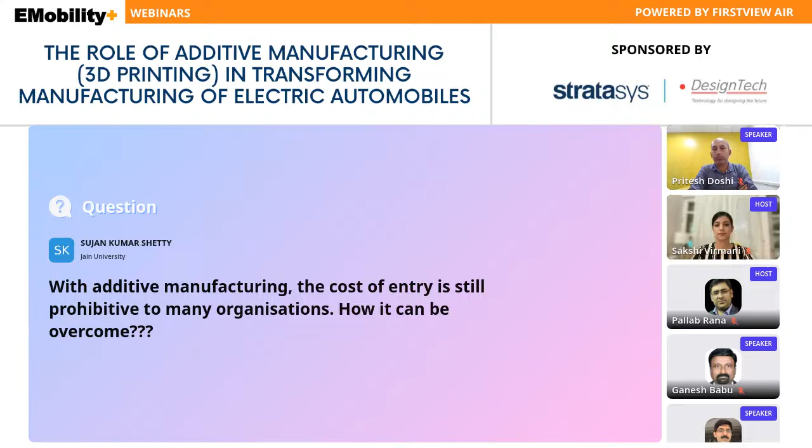So I'll just take the last question, almost similar to the last two questions. I'll take the second last one. Does adoption of 3D printing in EV manufacturing increase EV makers' dependency on China for supply chain as far as 3D printing materials are concerned? So on the supply chain of 3D printed materials, do we have more dependency on China?

Well, maybe, if I may, I'll take this question. I would like to summarize that today Stratasys as a platform offers you materials from Stratasys itself, except for some of the technologies that allow open source materials. So there is no player in China that is supporting predominantly the major players in additive. Ideally, we are looking at an OEM supported material that controls and also results in quality outputs.

So adoption of 3D printing in EV manufacturing has definitely been there from pioneers like Reva Engineering, which has been acquired by Mahindra Electric now. They have all been users. Under the hood, component manufacturing using FDM technology has been followed and practiced. So when it comes to materials, there is no Stratasys technology that depends on China for any material supply.

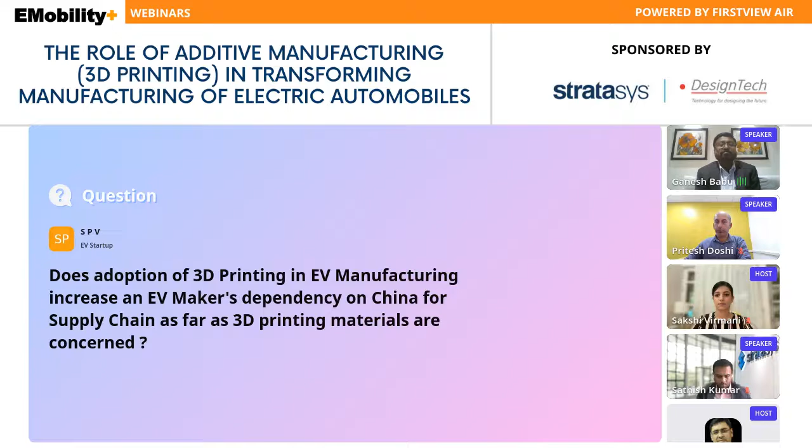That's quite interesting, actually. I think it's quite similar to Mr. Ganesh. On the raw material part, there is no more dependency on China. I just want to add one point along with that material selection. One of the materials we are using is PA11. That is completely made from castor oil, and maybe Ganesh was even mentioning that in his slide. And 80% of castor oil comes from India only, by the way, as news to the audience.